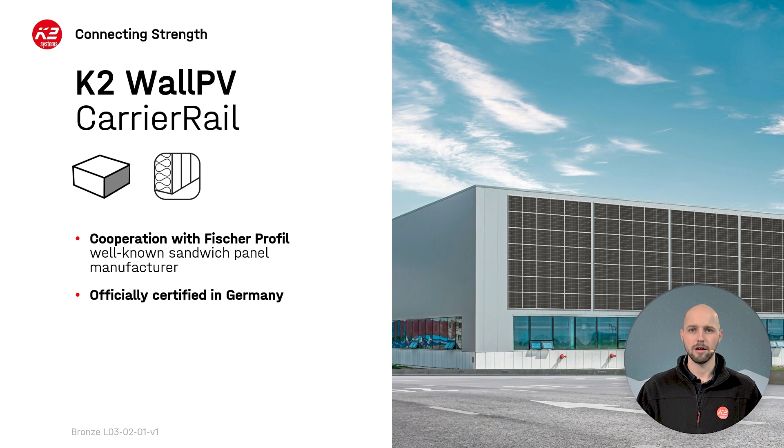For facades with sandwich panels, we have our CarrierRail system. Here we have a cooperation with Fischer Profil and their Swiss division Montana. Our system, in combination with Fischer Profil panels, is certified in Germany, and due to thread forming screws, there is no risk of damage to the thermal insulation.

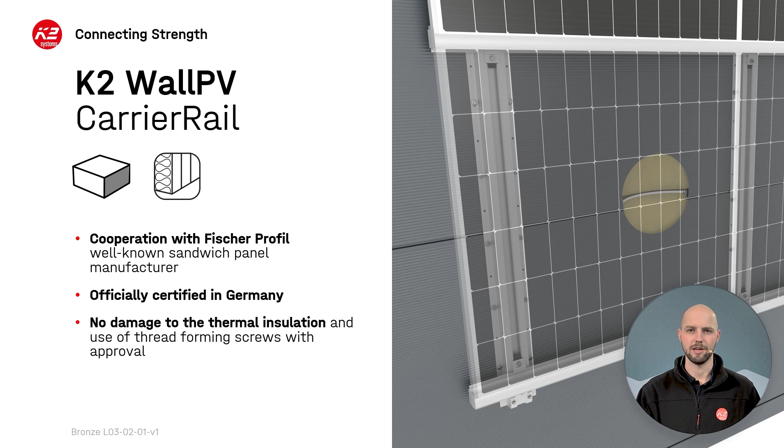Let's have a closer look at our system and its components. In this overview, we can see our carrier rail as a base rail going vertically, and on top of the carrier rail, we have our insertion rail connected via our cross connector, which we will see in the next close-ups.

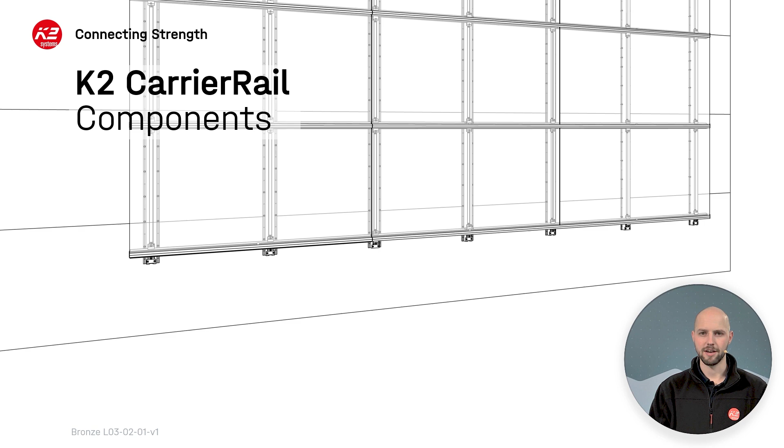On top of the picture, we can see our carrier rail, which is our base rail for this system. It is always mounted vertically. On top of the carrier rail, you then mount the cross connector with our MK2 and our M8 hexagon bolts. Beneath the cross connector, you screw in the anti-slip plate just as an additional security measurement.

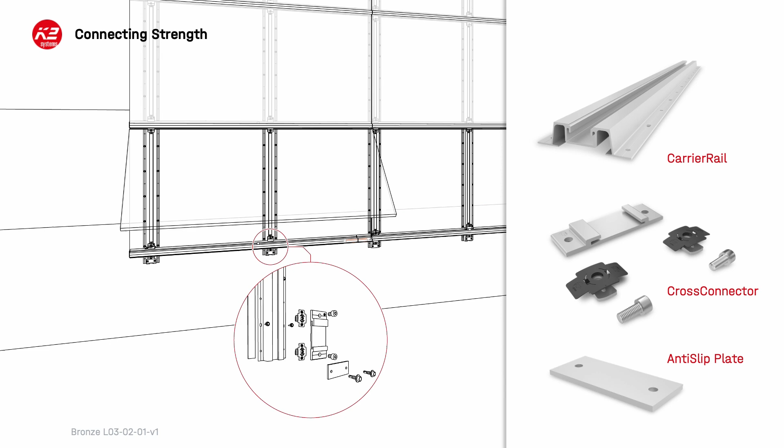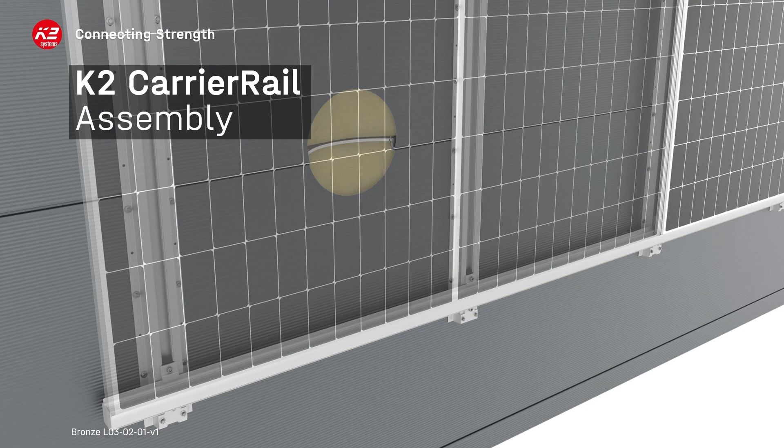It always sits at the top between two modules, so we can ensure ventilation and less migration of the modules. Following that, you will see a short assembly demo video.

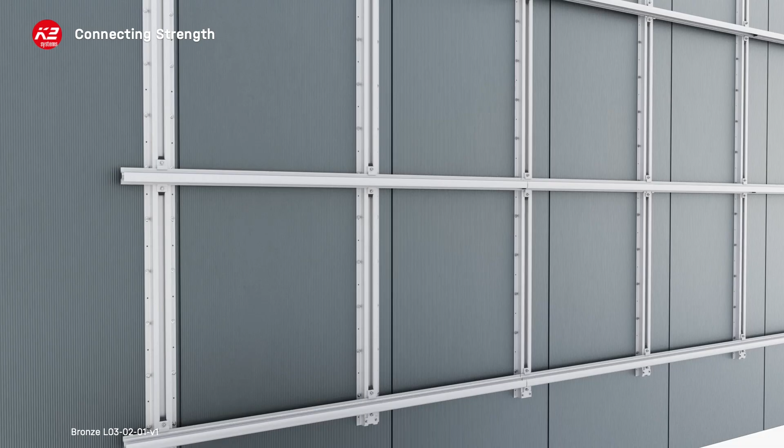Firstly, the carrier rails get mounted vertically to our sandwich panels. Then the cross connector and the anti-slip plate are mounted. After that, you can insert the insertion rail and start then putting in PV modules.

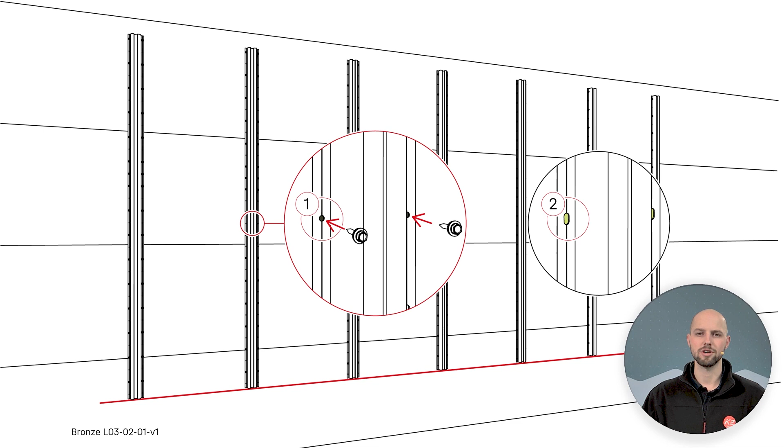But let's have a closer look at the assembly of this system. In the first step here, we will measure the starting point of the rails and start to assemble the rails according to our project plan.

First, we start with fixation of two screws in the middle of the rail in the fixating points, and the other holes we will have the gliding points.

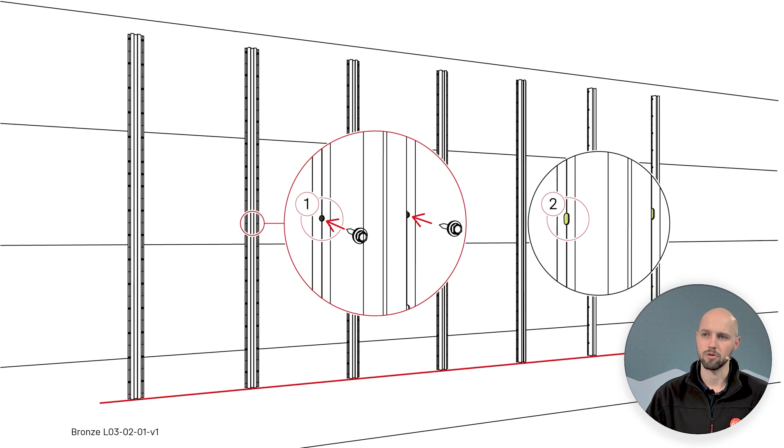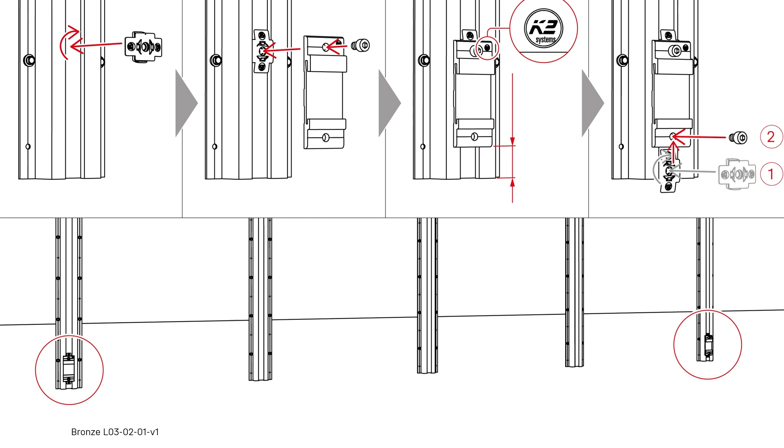In the next step, we put our cross connectors onto the carrier rail. Usually you start with the first MK2, then you apply the cross connector, fix it with the first M8 bolt, and afterwards putting in the second MK2 and the second M8 bolt. We start with the very first cross connector and the very last cross connector so that we can level out the insertion rail on the perfect level.

Then you can slide in your insertion rail. You only have to watch for your cantilever. This has to be at least 50 millimeters, and the maximum will be always a fourth of the span width between your carrier rails.

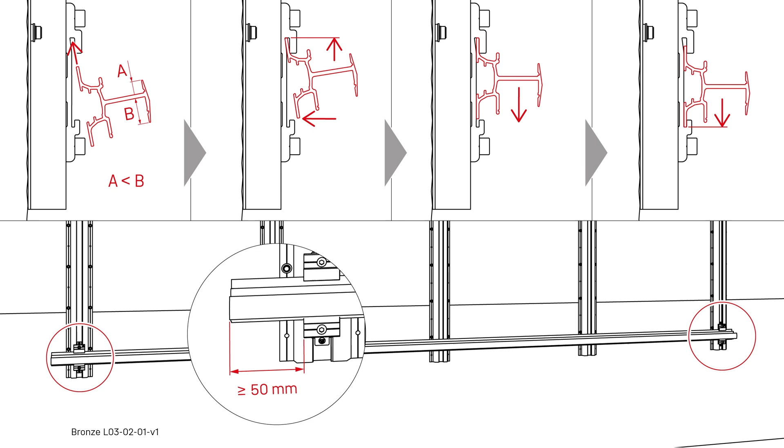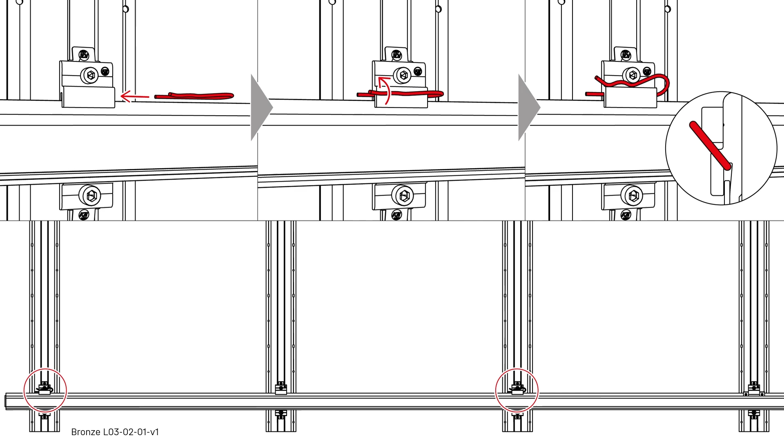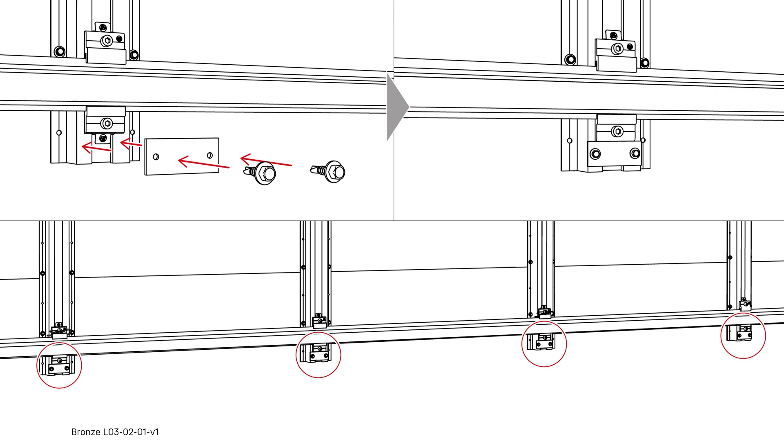Then after placing the other cross connectors on the rail and behind the insertion rail, we will put in at least 2 of the spring plugs at the top of the insertion rail into the cross connector, just like seen on the picture. Afterwards, we put on the anti-slip plate right beneath the cross connector, just as an additional securement.

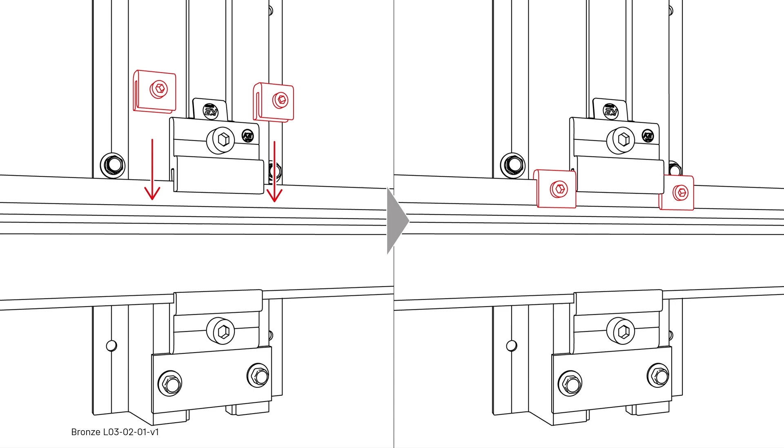Then we can put in our fixed stops. The fixed stops usually go in the middle of the rail on the left and the right side of the cross connector on each layer. It has the function that with thermal expansion, the rail can't slide out to the left or to the right.

For setting the next layer of insertion rails and cross connectors, you will have to measure the distance. It will be given out by the project report and your static report according to the size of your module.

Then in the end, you simply slide in the module to the upper side, just like you slided the insertion rail into the cross connector, you slide the module into the insertion rails. You pull it up to the downside of the upper rail, then you tilt it in and let it sink into the bottom rail.

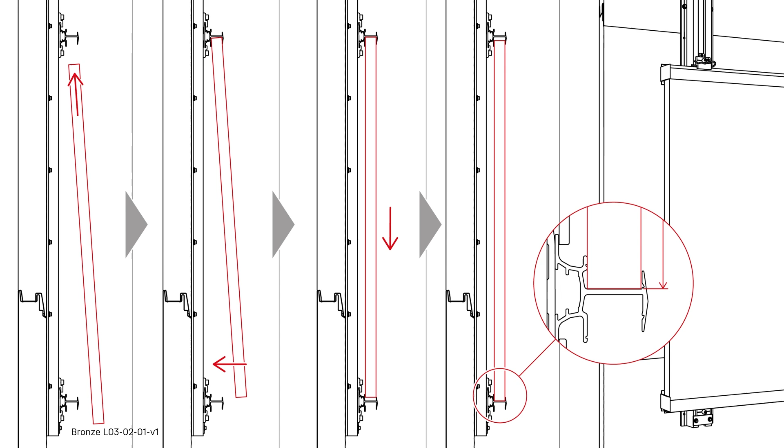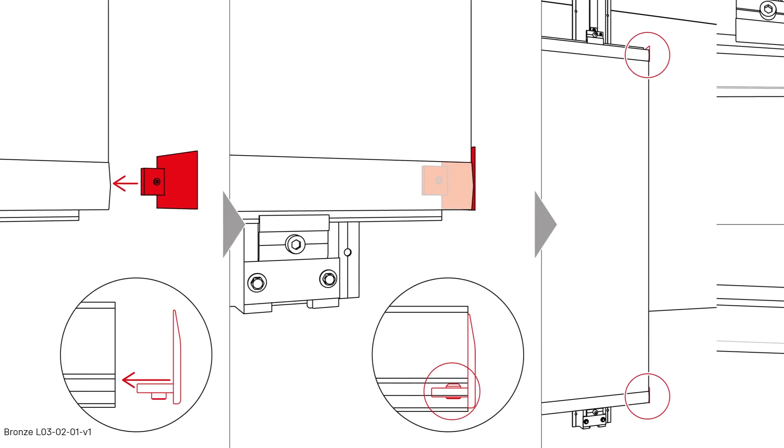After placing the first module, you would put in the module safety and then add the second module. At the end of a rail, for fixing the module and having a clean end of the system, we will use the end stop, which just slides in right at the end of the insertion rail.

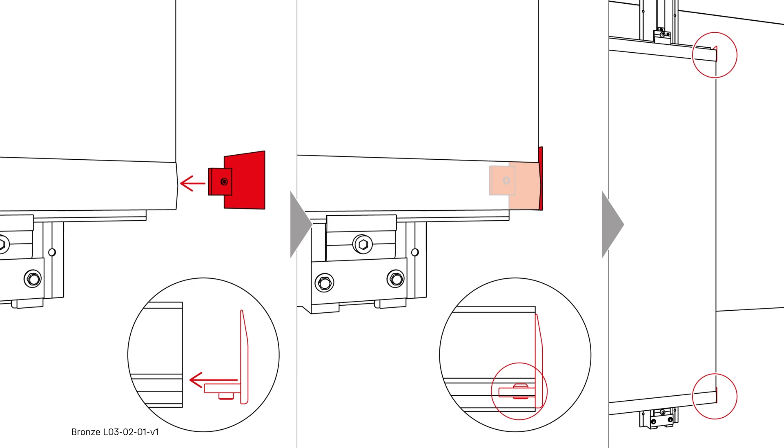As an optional and visual feature, we also have our covers, which you can put in at the very top of the system or the very bottom. That was our carrier rail system. Also watch our other videos of introduction to our WallPV systems.